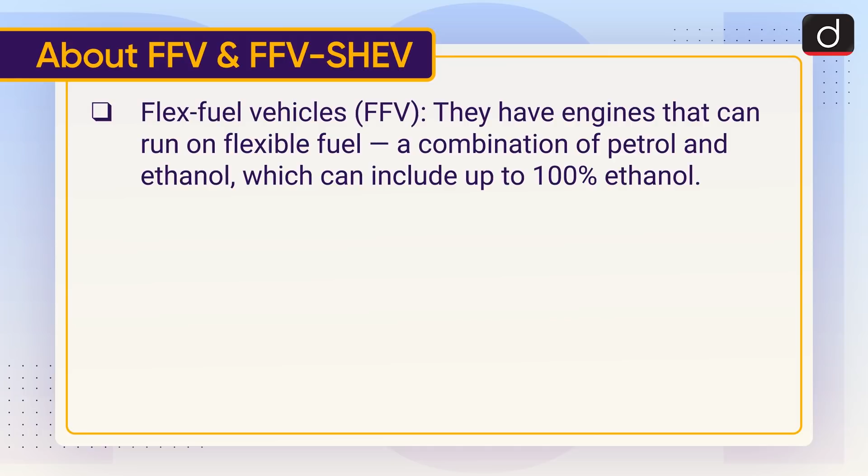Now let's discuss about FFV and FFV SHEV. FFV, that is flex fuel vehicles. They have engines that can run on flexible fuel, that is a combination of petrol and ethanol, which can include up to 100% ethanol. FFV SHEV, that is flex fuel strong hybrid electric vehicles: when FFV is integrated along with strong hybrid electric technology, it is referred to as FFV SHEVs.

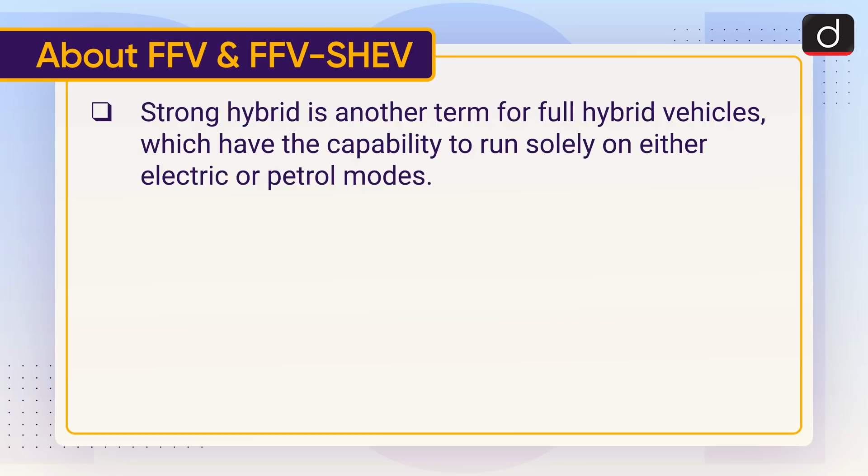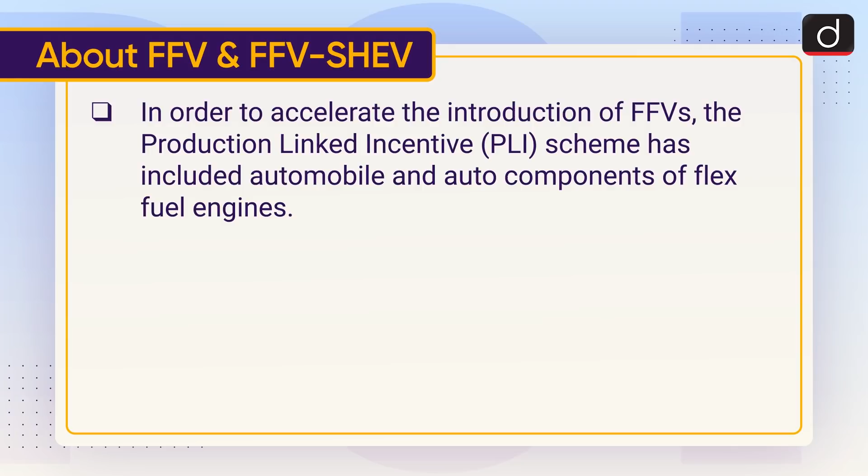Strong hybrid is another term for full hybrid vehicles, which have the capability to run solely on either electric or petrol modes. In contrast, mild hybrids cannot run purely on one of these modes and use the secondary mode merely as a supplement to the main mode of propulsion. In order to accelerate the introduction of FFVs, the Production Linked Incentive, that is PLI scheme, has included automobile and auto components of flex fuel engines.

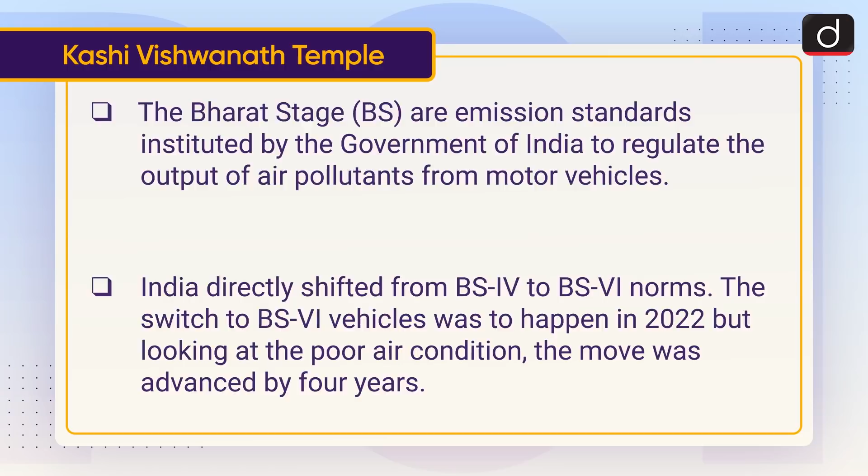Now we will discuss about BS6 fuel norms. The Bharat Stage, that is BS, emission standards are instituted by the Government of India to regulate the output of air pollutants from motor vehicles. India directly shifted from BS4 to BS6 norms. The switch to BS6 vehicles was to happen in 2022, but looking at the poor air condition, the move was advanced by 4 years. In BS6 fuel, the volume of particulate matter 2.5 ranges from 20 to 40 micrograms per cubic meter, whereas in BS4 fuel, it is up to 120 micrograms per cubic meter.

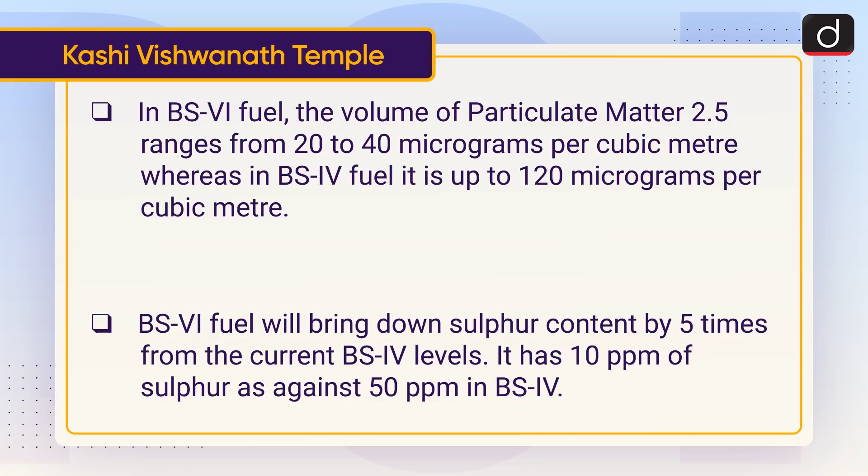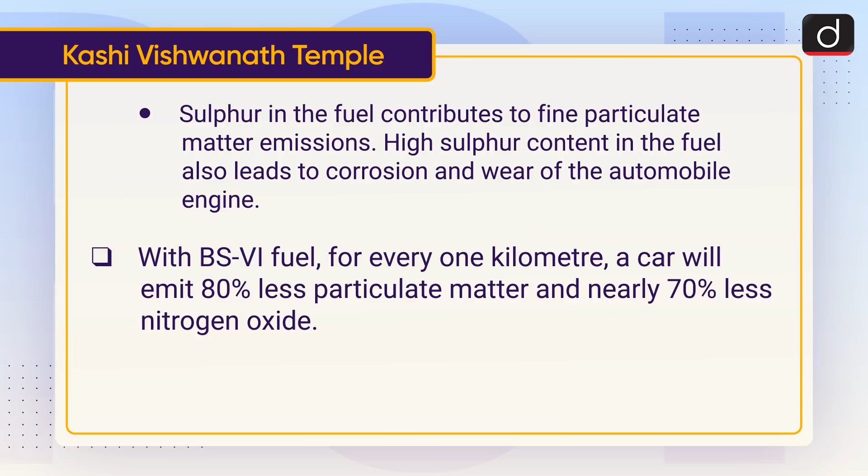BS6 fuel will bring down sulfur content by 5 times from the current BS4 levels. It has 10 ppm of sulfur as against 50 ppm in BS4. Sulfur in the fuel contributes to fine particulate matter emissions. High sulfur content in the fuel also leads to corrosion and wear of the automobile engine. With BS6 fuel, for every 1 kilometer, a car will emit 80% less particulate matter and nearly 70% less nitrogen oxide. Air pollutants in BS6 fuel are much less as compared to BS4 fuel.

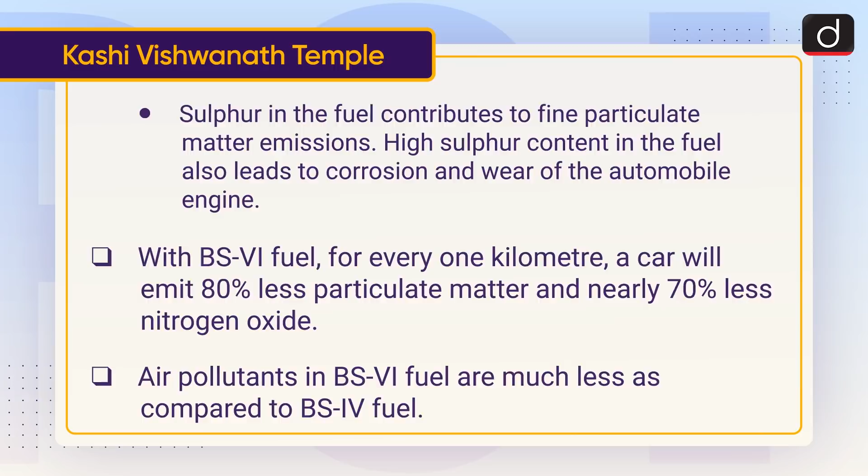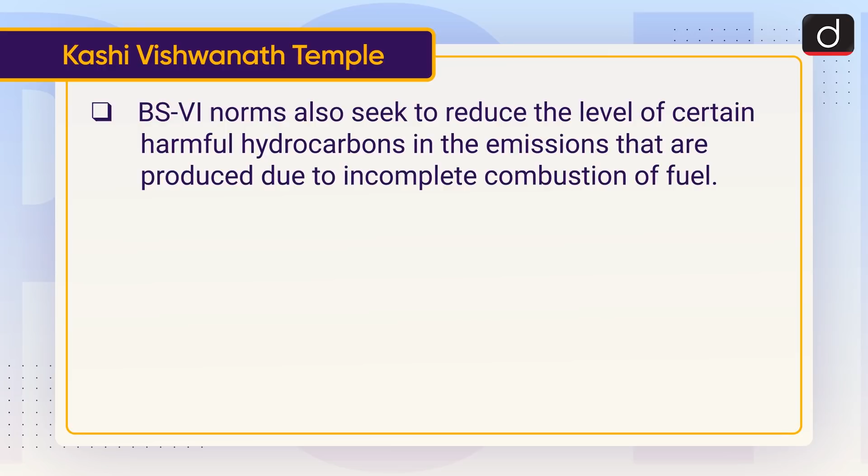BS6 norms also seek to reduce the level of certain harmful hydrocarbons in the emissions that are produced due to incomplete combustion of fuel. Now it's time for the practice question. Consider the following statements. 1. Flex fuel vehicles have engines that can run on flexible fuel, even 100% ethanol. 2. Flex fuel strong hybrid electric vehicles can run solely on electricity. Which of the above statements is or are correct? 1 only, 2 only, both 1 and 2, or neither 1 nor 2?